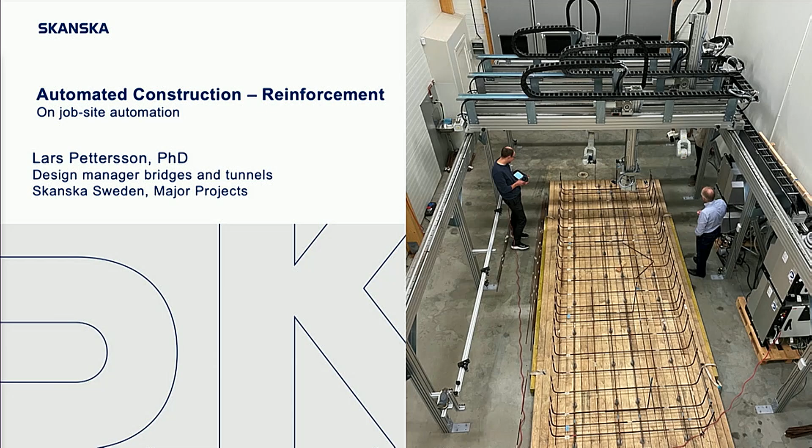Now let's see, switching is here. First, Skanska - for you that don't know about Skanska, it's a Swedish company founded more than 135 years ago. Today, you can see the turnover or revenue, 2022, approximately 160 billion Swedish crowns, to remember. Very important because it's equivalent to 15 billion US dollars approximately.

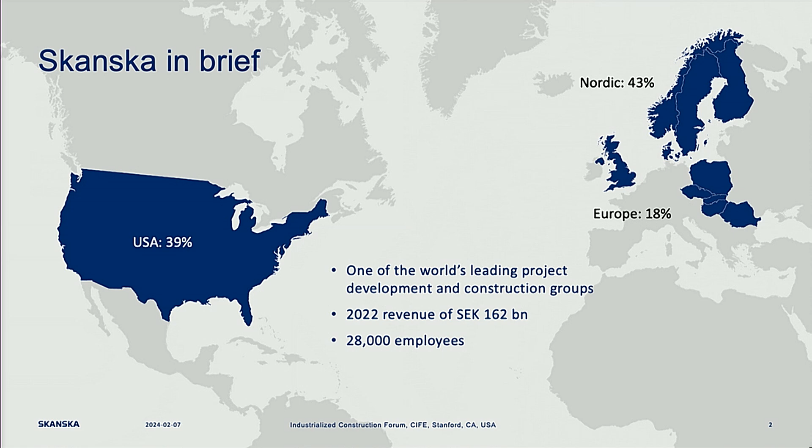The project that I'm going to talk about, we called it automated construction, and reinforcement is the subtitle. We have been focusing on job site automation. It was initiated by Skanska and ABB in 2014, ABB Robotics to be more precise, and the Swedish company Husqvarna joined later in this process.

We tried to form a team with deep know-how within construction and robotics. These two industries, they never meet. So we really needed deep knowledge, deep know-how in what is going on in construction and what is going on in robotics. Also, we realized that senior researchers were necessary to have in this team, and there were three different areas that we identified as important.

Robotics and construction, of course, but mathematics, because it turned out to be the most important part of this. We ran a PhD project in parallel to this, and that gave us the necessary connection to academia, to be able to first of all, of course, have a PhD student and to document the whole thing.

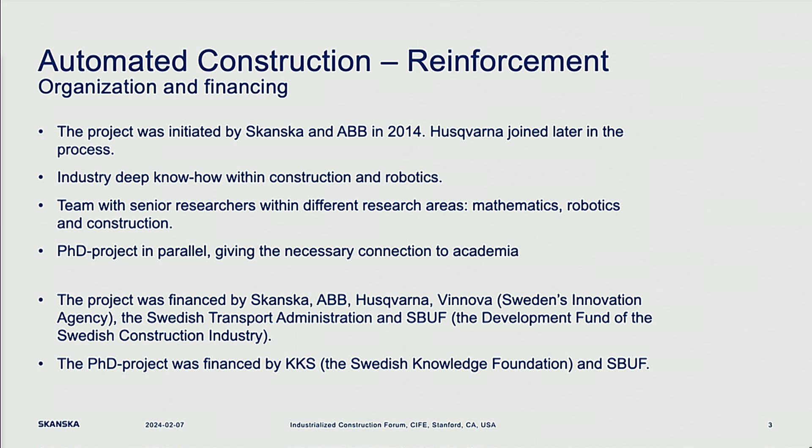Okay, now let's look at what this is all about. The background for this project was more efficient construction. We have heard here today, everything is focused on more efficient construction. We don't, in heavy civil, have the opportunity to use modular construction like you do in buildings.

All the structures that we build are site-specific, designed for site conditions, and they are built manually on the site. They are very big, very heavy, a lot of reinforcement is installed, and we wanted to achieve more efficient construction - that's as simple as that.

And the background is this project that we see here, the ring road around Stockholm, the northern part of it. It's a tunnel, as you can see on the left-hand side, and on the right-hand side you can see prefabrication of reinforcement units. We prefabricated nets, cages, etc., but manually on the site.

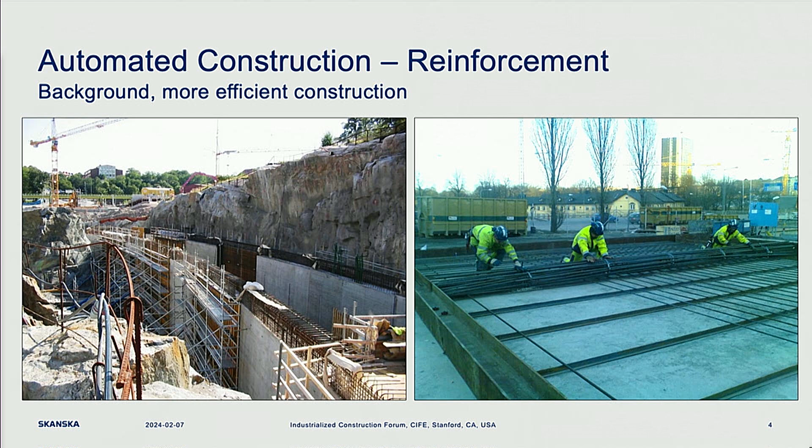We thought about the idea of automating this process. Could that possibly be done? The proposed solution that we came up with to eliminate that manual work that we saw in the previous slide was this setup.

3 robot arms hanging in a gantry, and that gantry enables the 3 robots to move in space, both X, Y, on a horizontal plane, and also vertically with the Z axis. And that gave us the possibility to move these bars around.

On the left-hand side, the whole idea was to have the cut and bend machine on the site, and also have the reinforcement, the rebars, on coils. So the whole setup: reinforcement on coils, cut and bend machine, and a gantry with robots to fabricate rebar cages.

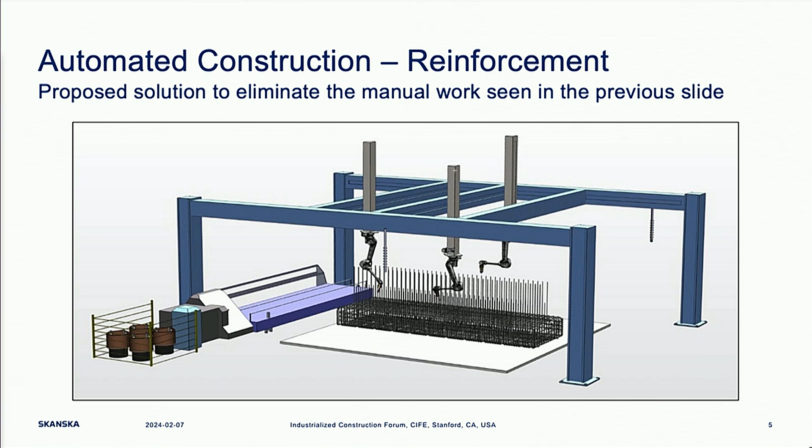All right. The main question, as it turned out, was how to control this machine. It's complicated enough. Of course, you have 3 robot arms that are collaborating. They can move in space and so on. So that is, of course, complicated. But how to control it?

If we look at the left-hand side here, we see the automotive industry. They use robots everywhere for everything. They have a high volume, very low mix, can use serial production, and they have repetitive robot movements, which makes it possible to program them. So this is done by programming of the robots, and they do this over and over again.

But if we look at construction, it's the complete opposite. If we look at the reinforcement, the rebar cage, it's often just one of each of these cages in, for example, a bridge project. Just one. And then we have another one that is not the same. It will look different. So we don't have that serial production that we can see in the automotive industry. It's often just one.

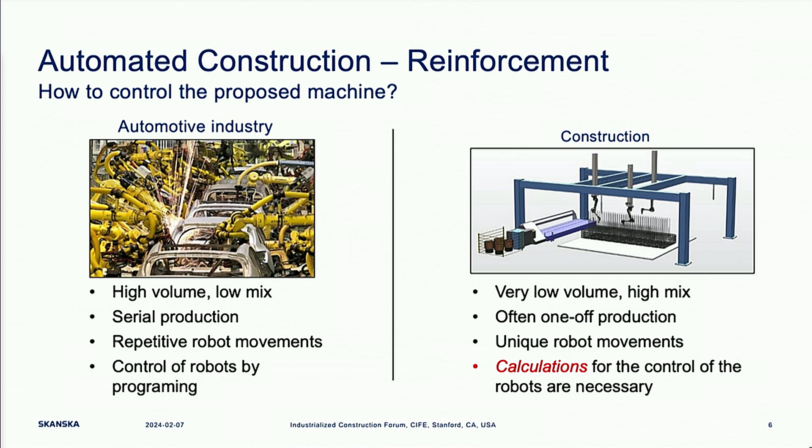Okay. The conclusion here was that it's necessary to calculate the robot movements. And the question is, what kind of input do we have to do that? If we are supposed to calculate the robot movements to fabricate the rebar cage, what is the input?

Yeah, there are two types of input. Today, everything that we design, we also model in 3D. So there is a 3D model of the reinforcement. Okay, so that is a good input with geometry and rebar data. That is one thing. The other thing that is really important is how to build - what is really done in detail on the sites when you install reinforcement.

And it can be turned into 3 different parts: bar installation order, how to use the robot tools or the tools at the site - when it comes to rebar, it's gripping and fixing the bars - and then when it comes to the robot world, you have path planning, including collision control.

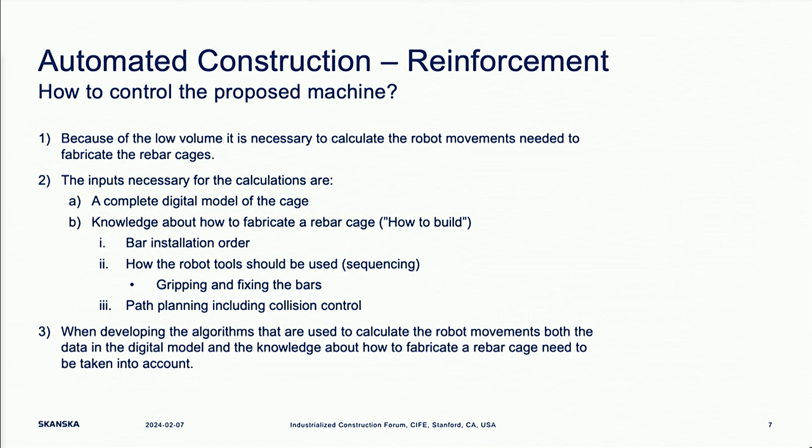So, to summarize, we concluded that you have two things: a digital model, and you have the information on how to build. That is what you have to develop algorithms to calculate all the robot movements.

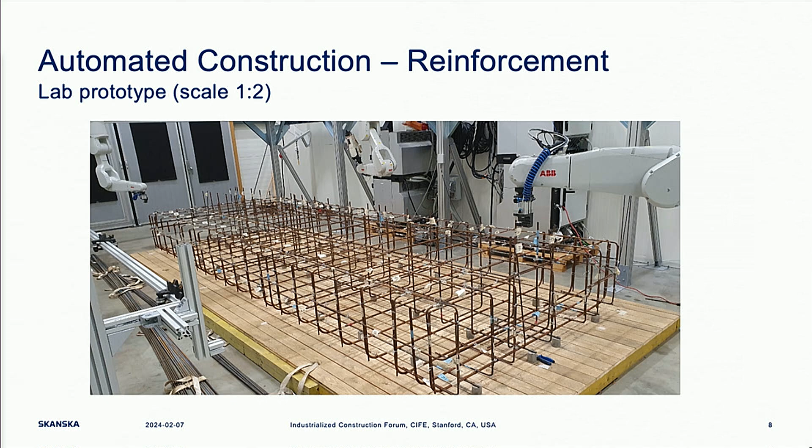Trying to summarize what this is all about, on the left-hand side here you can see the second cage that we used. These two cages, by the way, the first one is from a bridge that we built some years ago, and this one is from a tunnel project. So they are real cages, but scale 1 to 2.

On the left-hand side you see the digital model. It's a result of the work from the structural design. The structural engineer develops this, calculates of course, and prepares this digital model. That I would call a standard procedure in the construction industry. This is where we are at today.

What we have then done is develop algorithms that calculate all the necessary robot movements to fabricate that cage automatically. On the right-hand side here, you can see this cage being fabricated, and later I will show you a short video that shows this process going on.

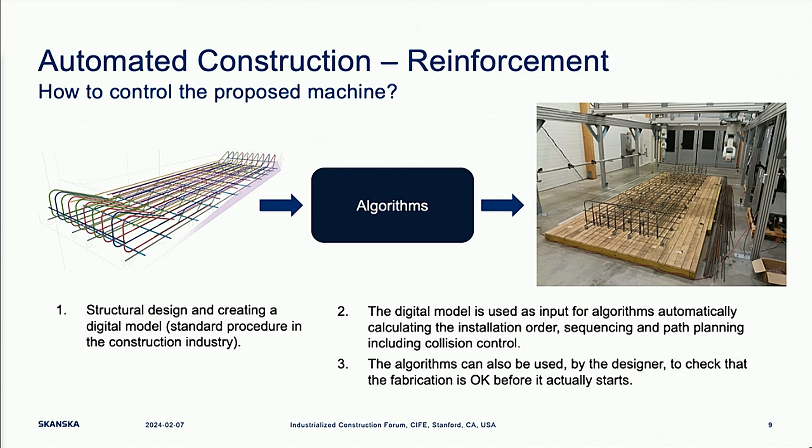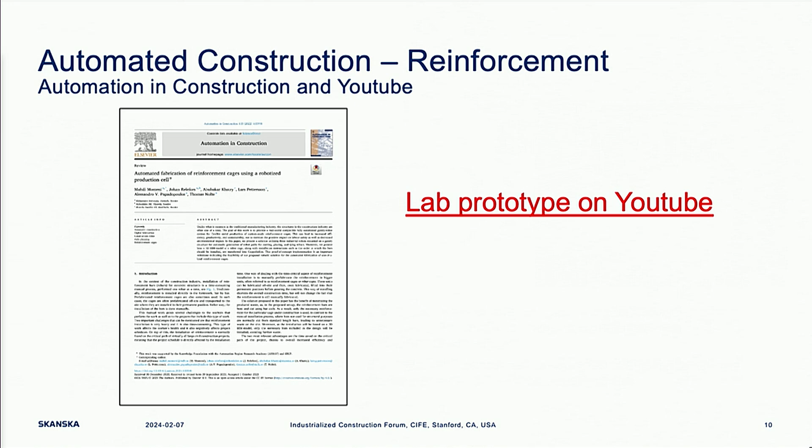Okay, good, last slide: documentation. In this PhD project we have, of course, written some papers. This is one of them, in Automation in Construction, where we detail the whole process. So that one is documented.

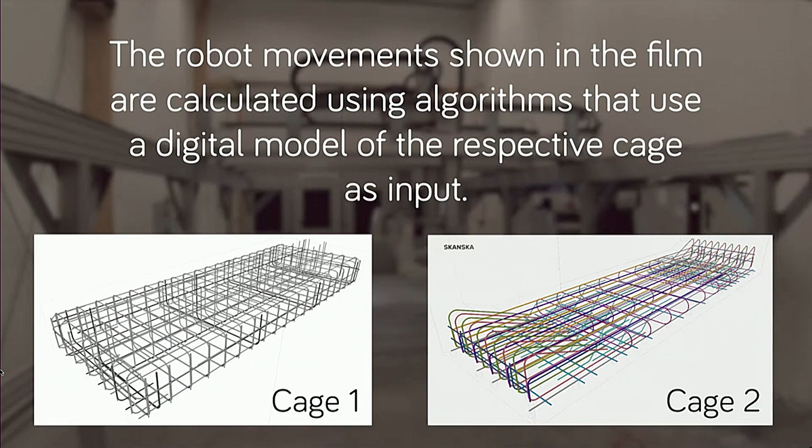And we have also a small YouTube video, if I can just show a few seconds of that. Here we can see it and try to add some text, no sound. We wanted to document that this is in fact possible to do. We see the two cages here, we call them 1 and 2. It's just 3 minutes, but we'll stop here in a short one.

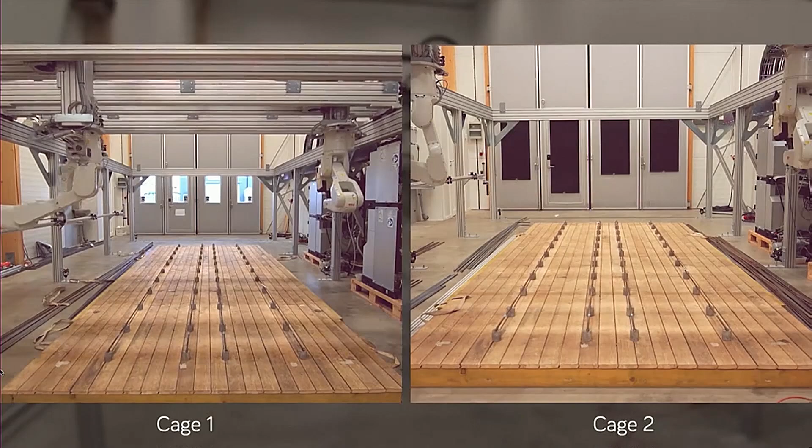What you can see here is this machine, I call it a machine, building these two cages. And all these robot movements, they are actually calculated, not programmed. So the algorithms find the installation order, calculate all these robot movements needed to install the bars here, and in the meantime check that there are no collisions.

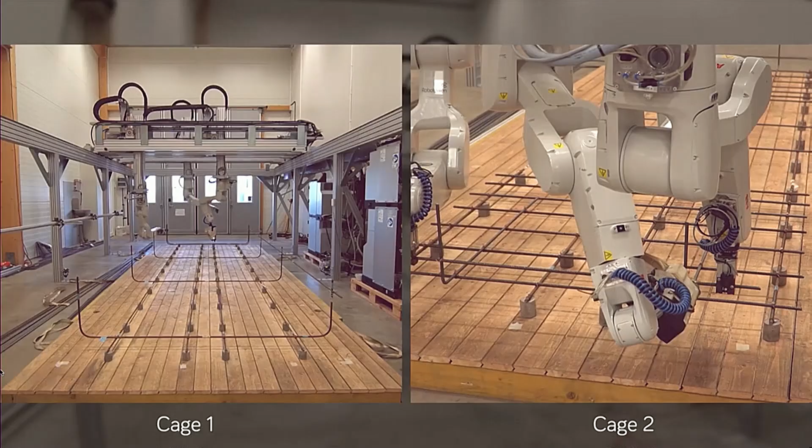And we used, of course, fast forward, it doesn't go this fast, but I can tell you robots are very fast if you want to. So we can stop it here. Thank you.

I have one final comment. We didn't really realize what this was all about when we started it. We just wanted to see, is it possible to install reinforcement using industrial robots?

And I would say the answer to that is yes, but I think there is a more important conclusion to this, and that is that job site automation is in fact possible. You need to have these digital models. We saw digital models here today, and I agree they are very expensive, but the tools are getting better and better. By using these digital models, we can achieve things like this, and we can start using machines, robots, on the sites. So, thank you.